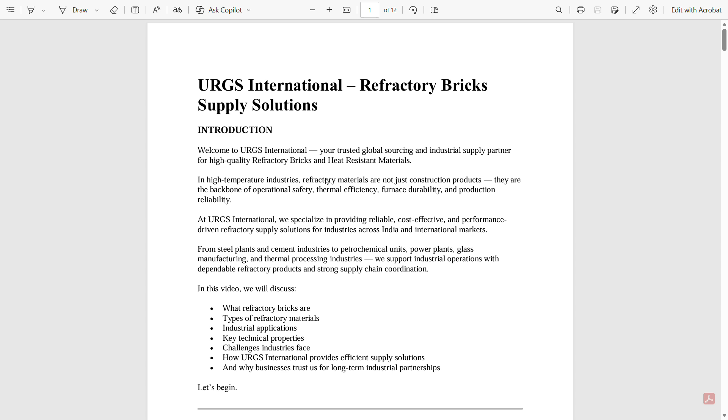In high temperature industries, refractory materials are not just construction products, they are the backbone of operational safety, thermal efficiency, furnace durability, and production reliability. At URGS International, we specialize in providing reliable, cost effective, and performance driven refractory supply solutions for industries across India and international markets.

From steel plants and cement industries to petrochemical units, power plants, glass manufacturing, and thermal processing industries, we support industrial operations with dependable refractory products and strong supply chain coordination.

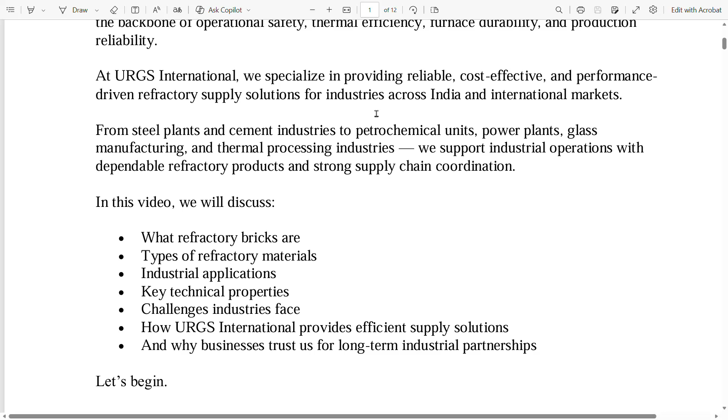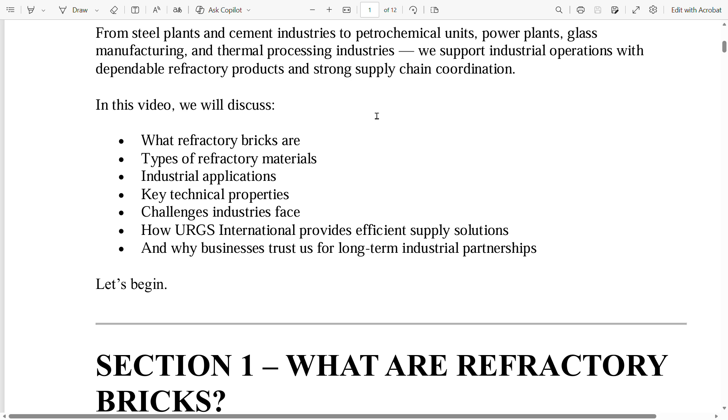In this video, we will discuss what refractory bricks are, types of refractory materials, industrial applications, key technical properties, challenges industries face, how URGS International provides efficient supply solutions, and why businesses trust us for long term industrial partnerships. Let us begin.

Section 1. What are refractory bricks? Let us see this. Refractory bricks are specialized heat resistant materials designed to withstand extremely high temperatures, thermal shocks, abrasion, chemical attacks, and harsh industrial environments.

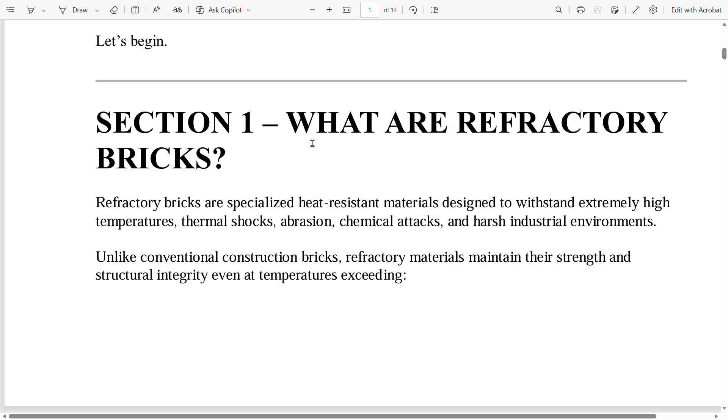Unlike conventional construction bricks, refractory materials maintain their strength and structural integrity even at temperatures exceeding 1000 degrees Celsius, 1400 degrees Celsius, 1700 degrees Celsius, and even higher depending on composition.

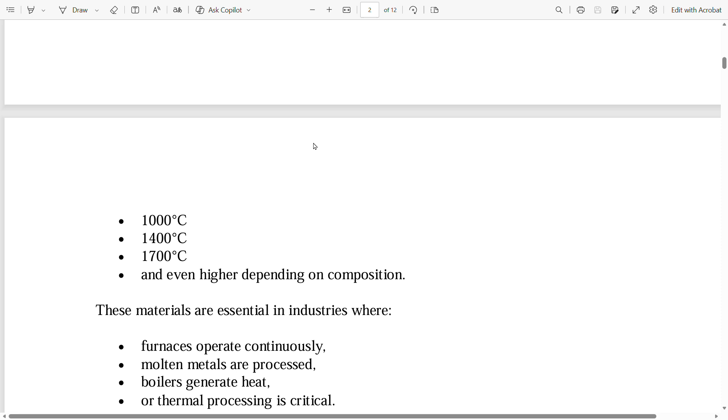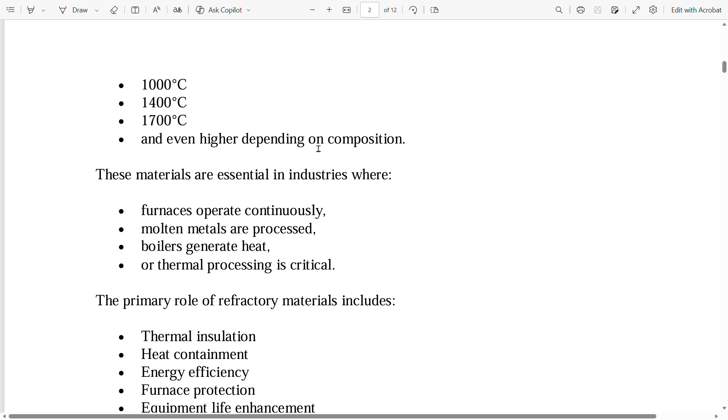These materials are essential in industries where furnaces operate continuously, molten metals are processed, boilers generate heat, or thermal processing is critical. The primary role of refractory materials includes thermal insulation, heat containment, energy efficiency, furnace protection, equipment life enhancement, process stability.

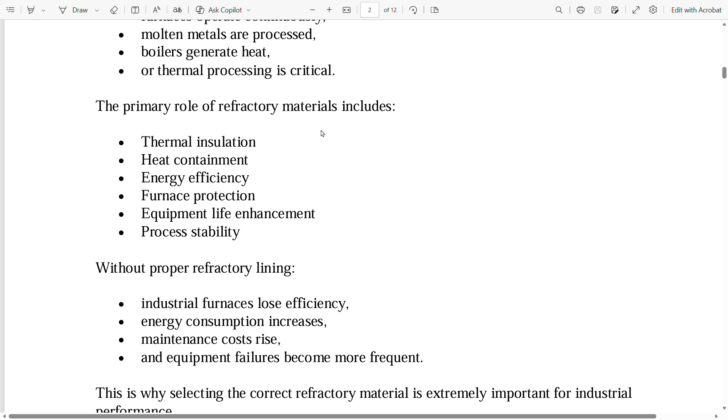Without proper refractory lining, industrial furnaces lose efficiency, energy consumption increases, maintenance costs rise, and equipment failures become more frequent. This is why selecting the correct refractory material is extremely important for industrial performance.

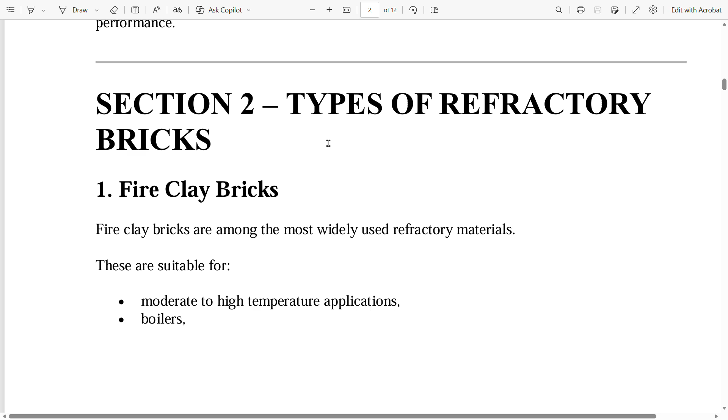Now, types of refractory bricks. Let us see this. First, fire clay bricks. Fire clay bricks are among the most widely used refractory materials. These are suitable for moderate to high temperature applications, boilers, small furnaces, kilns, and general industrial heating systems. Advantages: good thermal resistance, cost effective, reliable durability, suitable for various industrial operations.

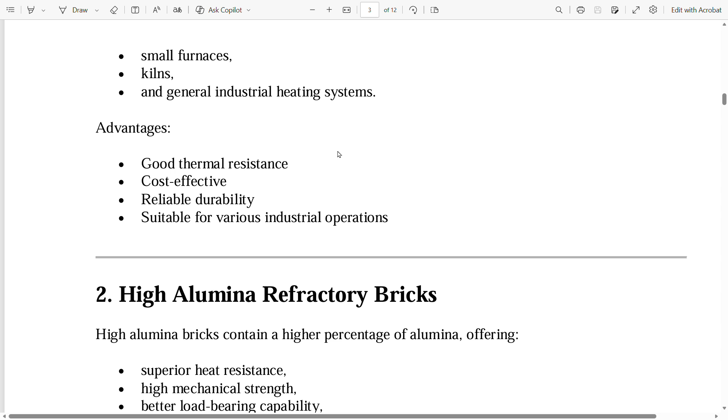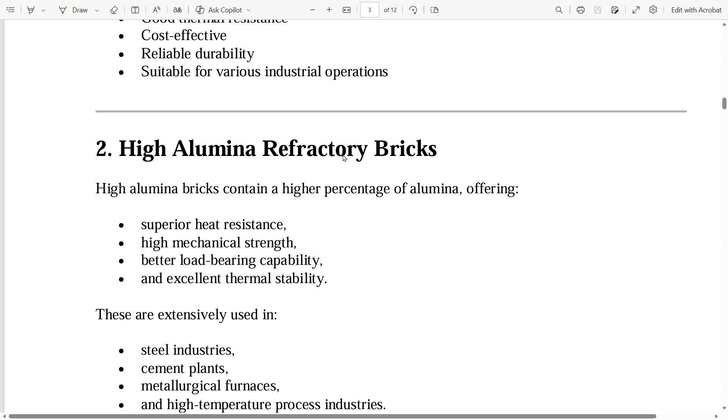Second is high alumina refractory bricks. High alumina bricks contain a higher percentage of alumina, offering superior heat resistance, high mechanical strength, better load bearing capability, and excellent thermal stability. These are extensively used in steel industries, cement plants, metallurgical furnaces, and high temperature process industries.

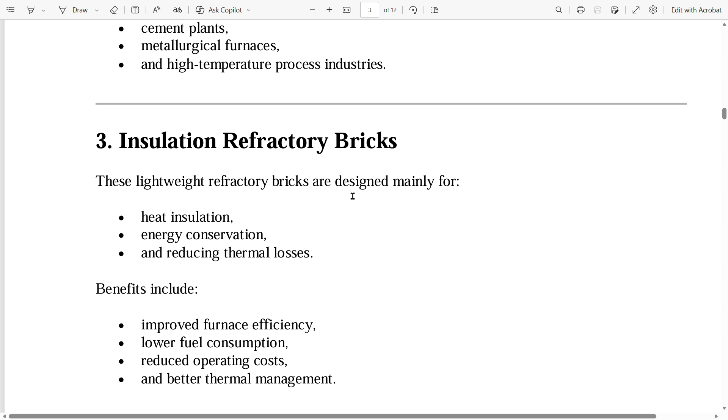Next is insulation refractory bricks. These lightweight refractory bricks are designed mainly for heat insulation, energy conservation, and reducing thermal losses. Benefits include improved furnace efficiency, lower fuel consumption, reduced operating costs, and better thermal management.

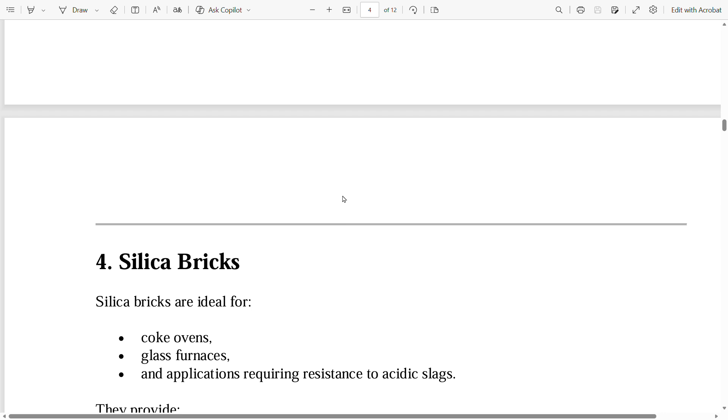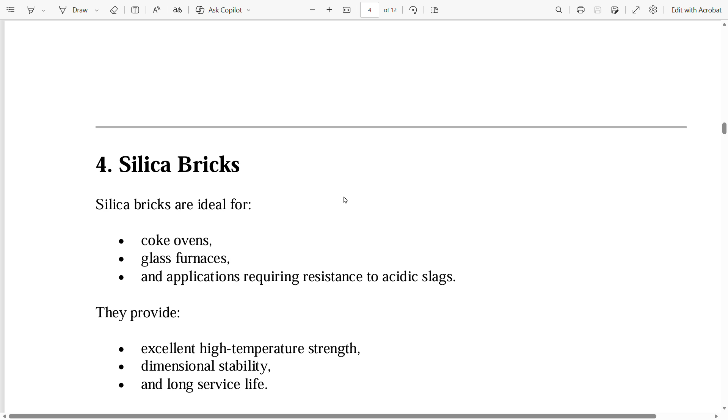Next is silica bricks. Silica bricks are ideal for coke ovens, glass furnaces, and applications requiring resistance to acidic slags. They provide excellent high temperature strength, dimensional stability, and long service life.

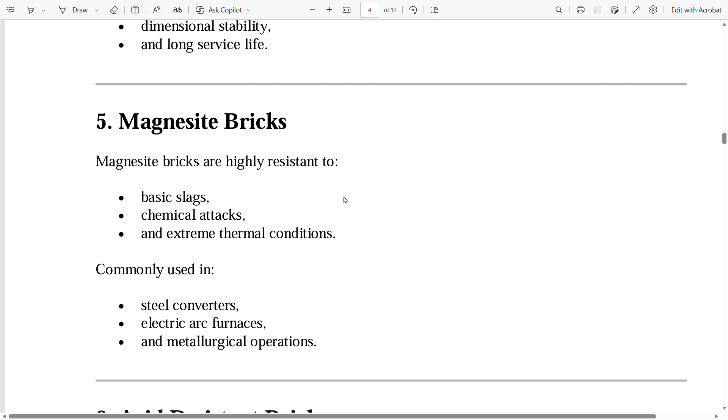Next is magnesite bricks. Fifth, these bricks are highly resistant to basic slags, chemical attacks, and extreme thermal conditions. Commonly used in steel converters, electric arc furnaces, and metallurgical operations.

Then sixth is acid resistant bricks. These bricks are specially designed for chemical industries, acid processing units, and corrosive industrial environments. Their main advantage is protection against chemical degradation.

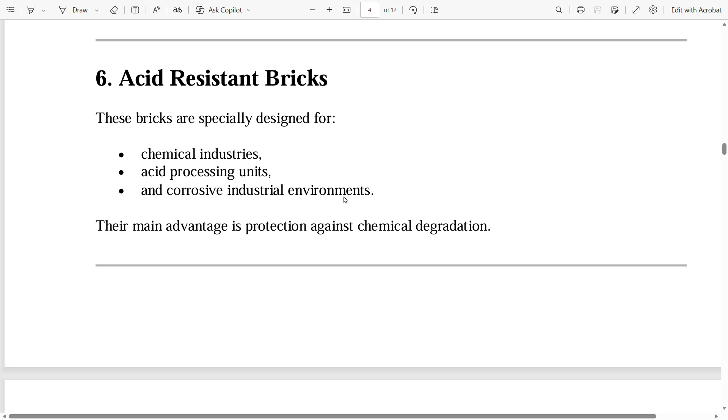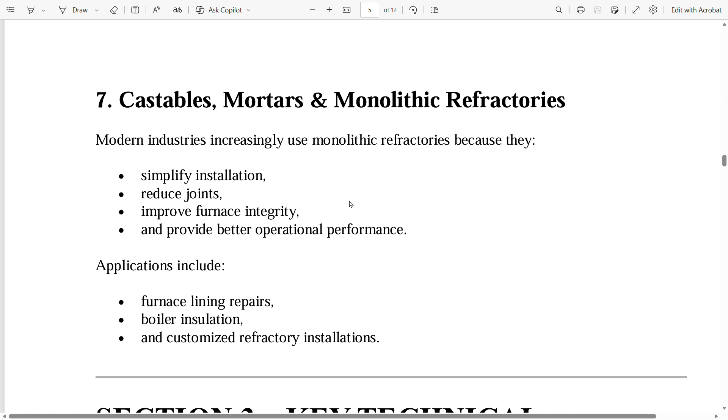Then seventh, castables, mortars, and monolithic refractories. Modern industries increasingly use monolithic refractories because they simplify installation, reduce joints, improve furnace integrity, and provide better operational performance. Applications include furnace lining repairs, boiler insulation, and customized refractory installations.

Section 3, Key Technical Advantages. At URGS International, we understand that refractory performance directly impacts industrial productivity. Let us discuss the key technical advantages of high quality refractory materials.

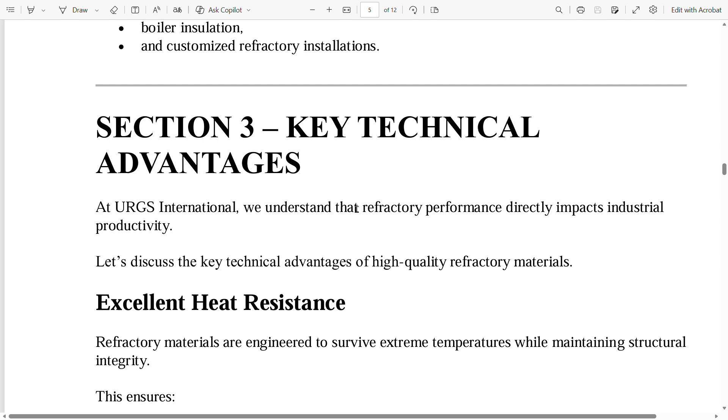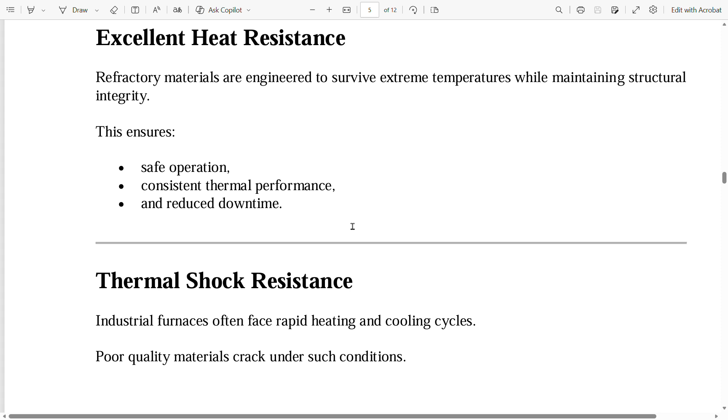Excellent heat resistance. Refractory materials are engineered to survive extreme temperatures while maintaining structural integrity. This ensures safe operation, consistent thermal performance, and reduced downtime. Thermal shock resistance: industrial furnaces often face rapid heating and cooling cycles. Poor quality materials crack under such conditions.

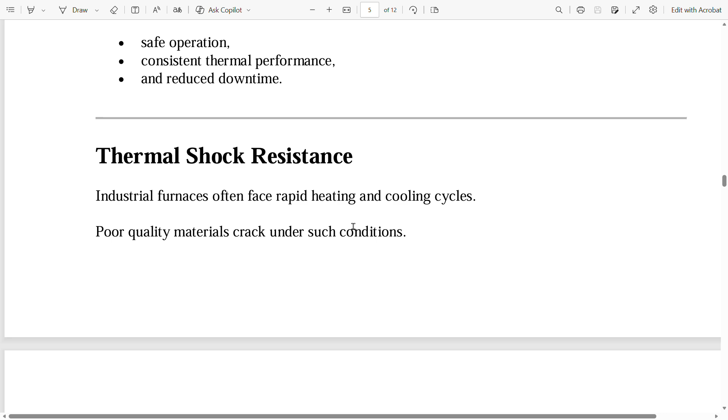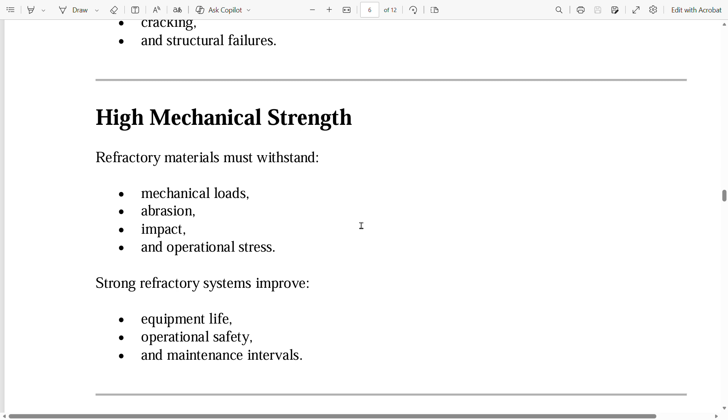High quality refractory bricks resist sudden temperature variations, cracking, and structural failures. They also offer high mechanical strength, withstanding mechanical loads, abrasion, impact, and operational stress. Strong refractory systems improve equipment life, operational safety, and maintenance intervals.

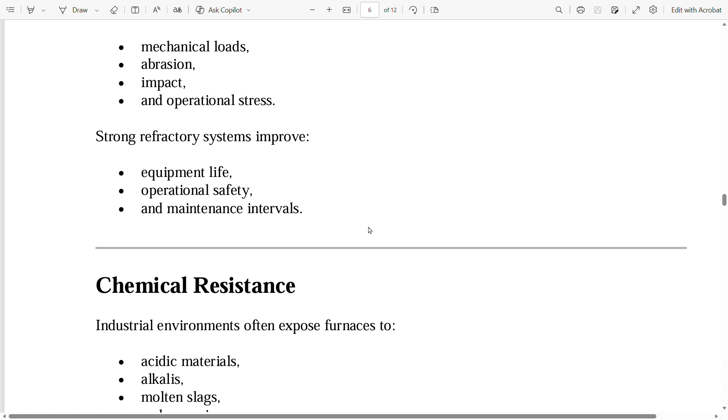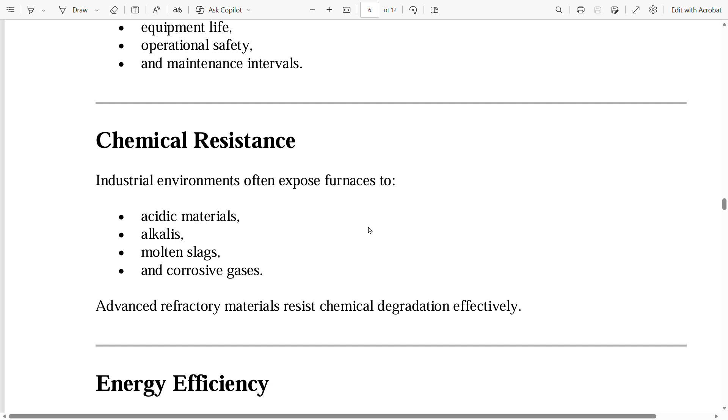Chemical resistance is also important. Industrial environments often expose furnaces to acidic materials, alkalis, molten slags, and corrosive gases. Advanced refractory materials resist chemical degradation effectively.

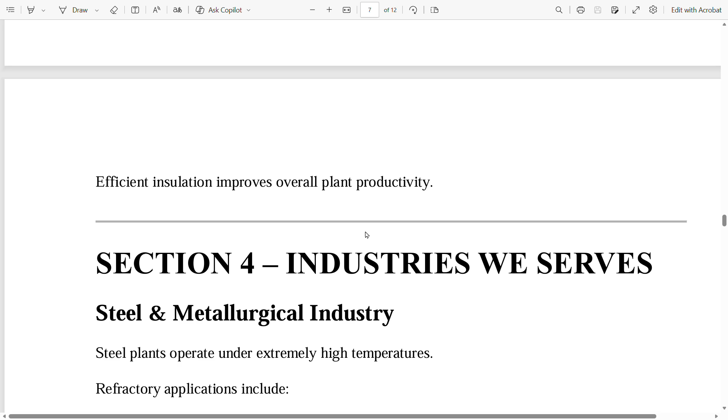Now, energy efficiency. Modern refractory systems help reduce fuel consumption, heat loss, and operating costs. Efficient insulation improves overall plant productivity.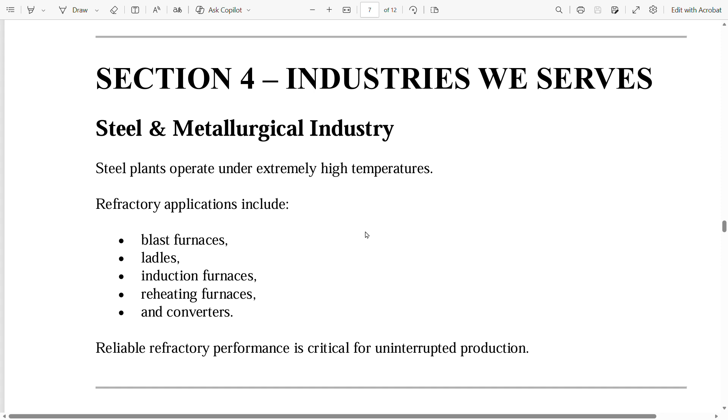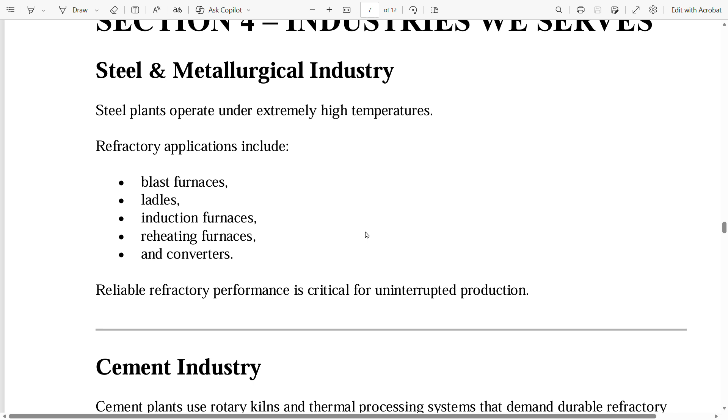Now, section 4, industries we serve. Steel and metallurgical industry. Steel plants operate under extremely high temperatures. Refractory applications include blast furnaces, ladles, induction furnaces, reheating furnaces, and converters. Reliable refractory performance is critical for uninterrupted production.

Cement industry: cement plants use rotary kilns and thermal processing systems that demand durable refractory lining. Proper refractory selection improves kiln life, reduces shutdowns, and supports energy efficiency.

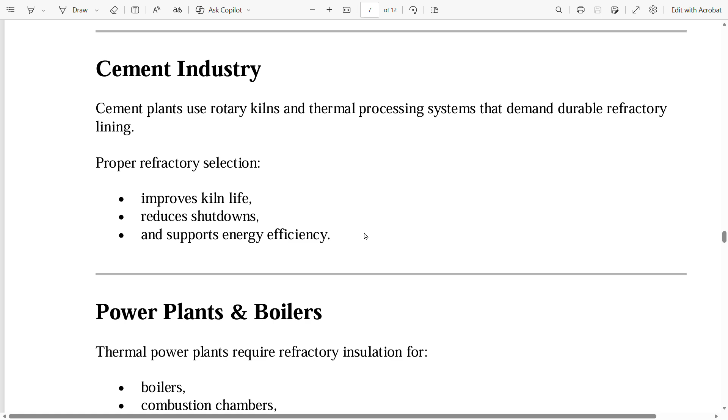Next, power plants and boilers. Thermal power plants require refractory insulation for boilers, combustion chambers, ash handling systems, and thermal processing units.

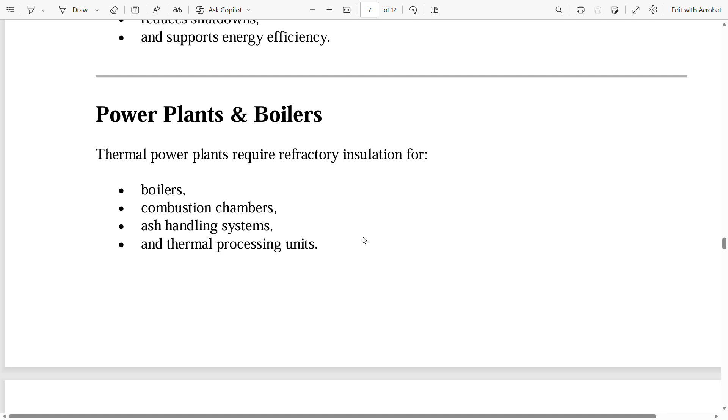Then the petrochemical and refinery industry. These industries need refractory materials resistant to high temperatures, chemical exposure, and aggressive industrial environments.

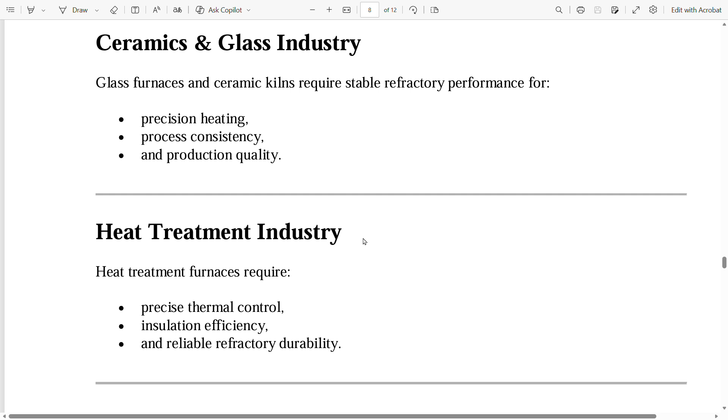Ceramics and glass industry: glass furnaces and ceramic kilns require stable refractory performance for precision heating, process consistency, and production quality. Heat treatment industry: heat treatment furnaces require precise thermal control, insulation efficiency, and reliable refractory durability.

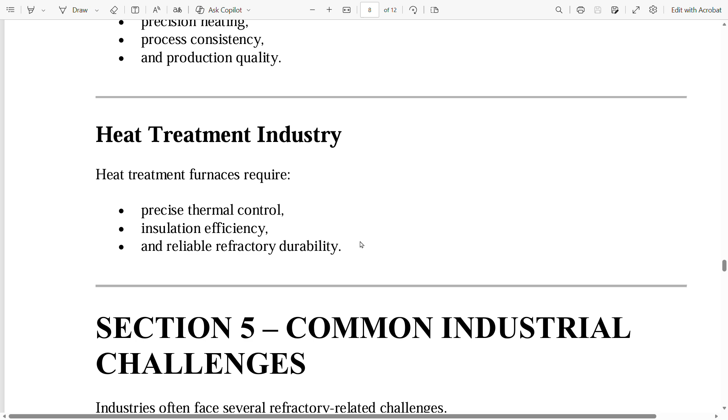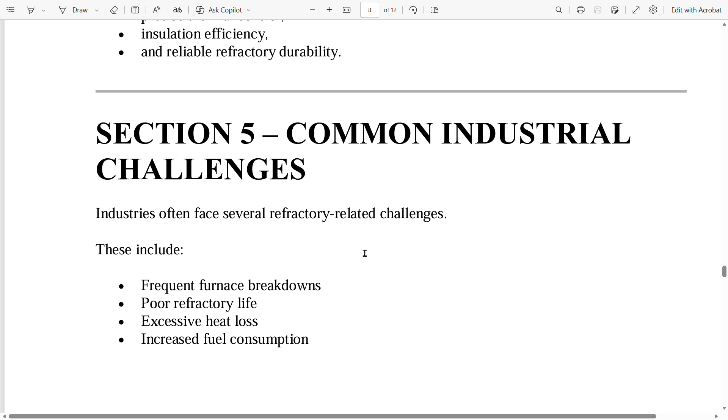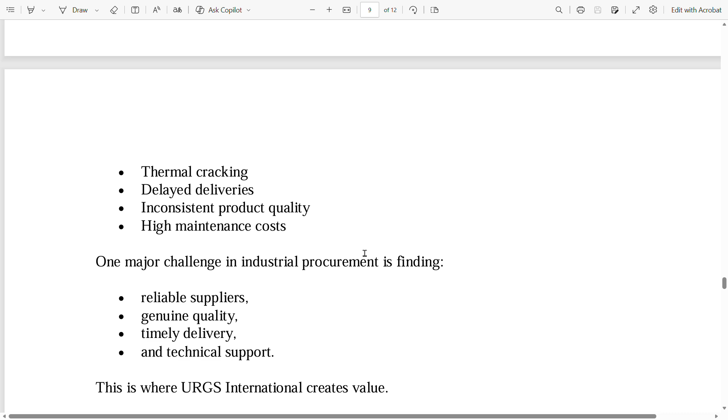Now, section 5, common industrial challenges. Industries often face several refractory related challenges. These include frequent furnace breakdowns, poor refractory life, excessive heat loss, increased fuel consumption, thermal cracking, delayed deliveries, inconsistent product quality, and high maintenance costs.

One major challenge in industrial procurement is finding reliable suppliers, genuine quality, timely delivery, and technical support. This is where URGS International creates value. So why choose URGS International? URGS International works as a trusted industrial sourcing and supply partner. We help customers all over the world simplify procurement while ensuring quality and reliability.

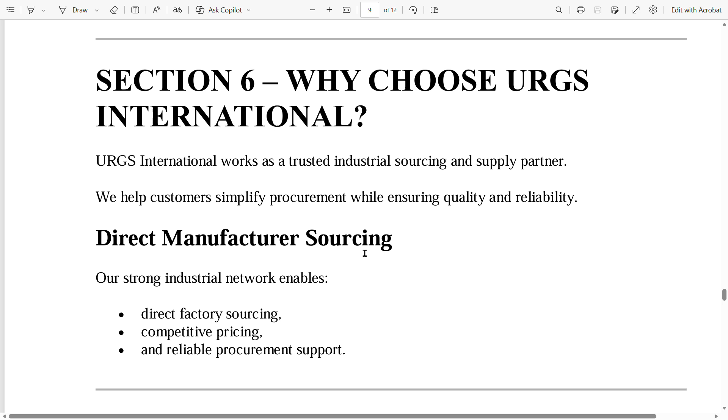Direct manufacturer sourcing: our strong industrial network enables direct factory sourcing, competitive pricing, and reliable procurement support.

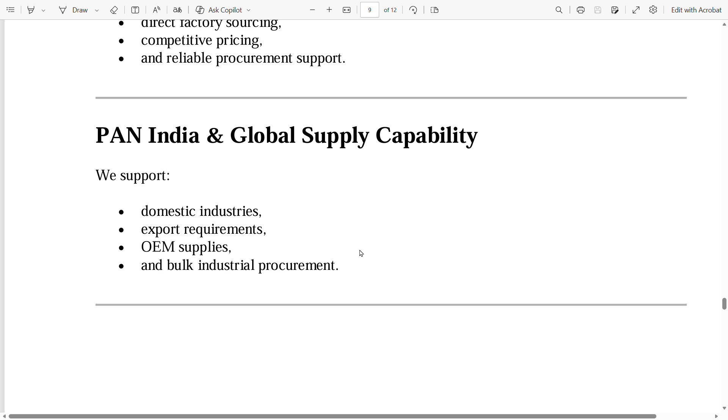Pan India and global supply capability. We support domestic industries, export requirements, OEM supplies, and bulk industrial procurement. Technical and commercial coordination.

Our team supports customers with product selection, supply coordination, technical understanding, and logistic management. Flexible supply solutions: we handle small orders, bulk supply, project based procurement, and long term industrial partnerships.

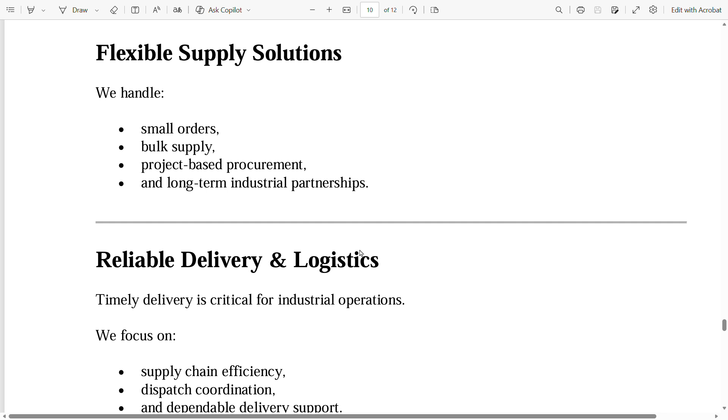Reliable delivery and logistics. Timely delivery is critical for industrial operations. We focus on supply chain efficiency, dispatch coordination, and dependable delivery support.

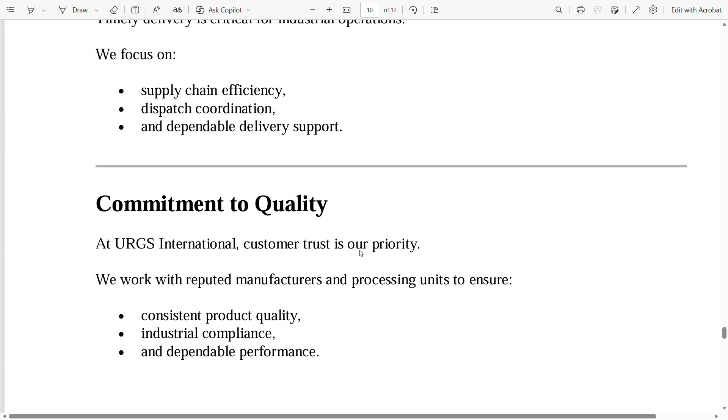Commitment to quality. At URGS International, customer trust is our priority. We work with reputed manufacturers and processing units to ensure consistent product quality, industrial compliance, and dependable performance.

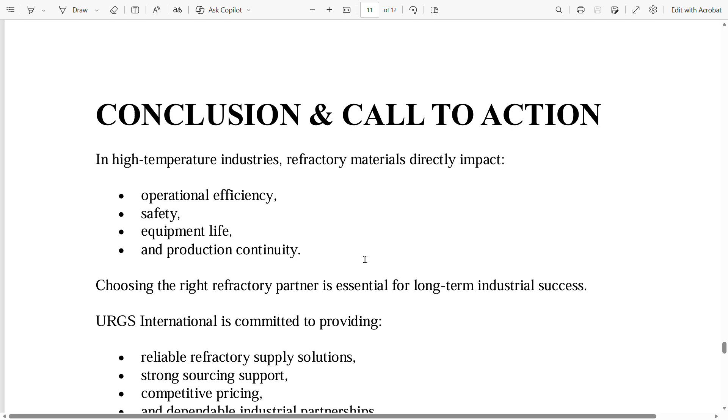At last, conclusion and call to action. In high temperature industries, refractory materials directly impact operational efficiency, safety, equipment life, and production continuity. Choosing the right refractory partner is essential for long-term industrial success.

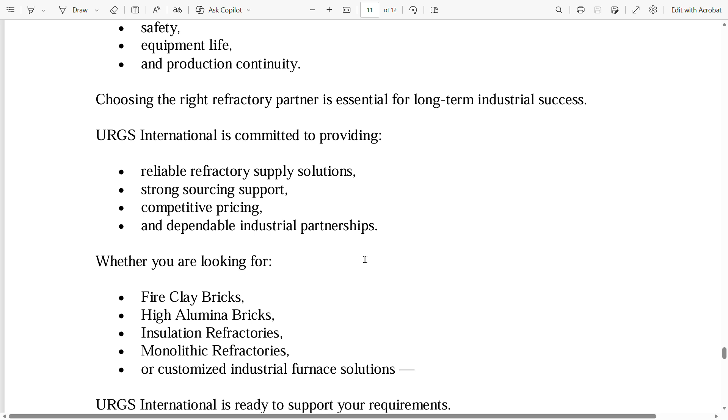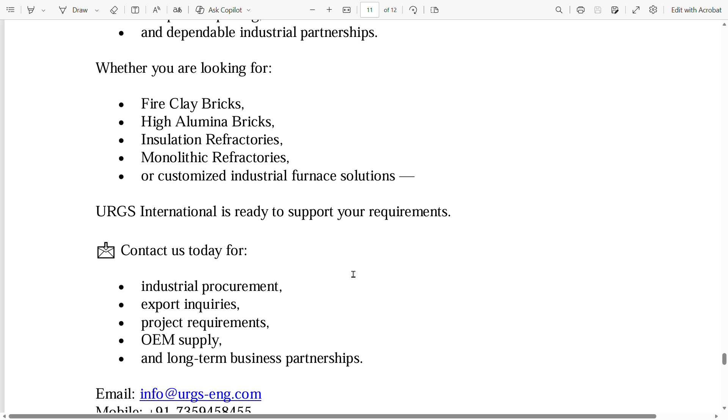URGS International is committed to providing reliable refractory supply solutions, strong sourcing support, competitive pricing, and dependable industrial partnerships. Whether you are looking for fire clay bricks, high alumina bricks, insulation refractories, monolithic refractories, or customized industrial furnace solutions, URGS International is ready to support your requirements.